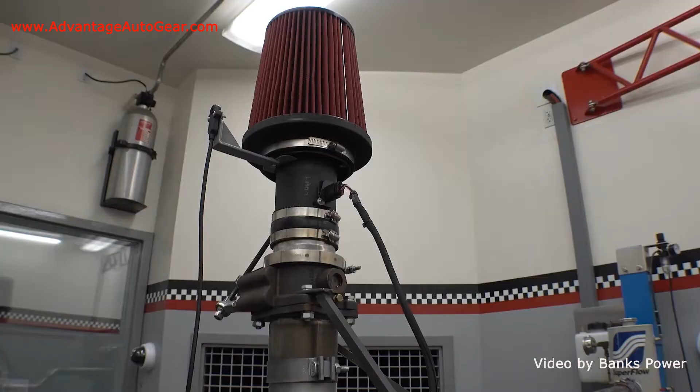Well, it's an intake air density control. I can regulate the air density going into the compressor of the turbocharger and duplicate various conditions, from high altitude to a crappy, lousy air intake system, especially one with a filter element naked under the hood with a hot mother engine. What we've done is set up a device and a test that'll show exactly how much horsepower you lose if you screw up or if you live at high altitude.

To help you understand what we're doing here, I'd like to take you back to high school. Let's go out in the shop. Okay, I want to get to some elemental stuff here. I want to take you back to the four-stroke process.

Most all of you have been exposed to this somewhere in your education, or if you're an enthusiast, you've heard it. Most engines today, in trucks, cars, whatever, are four-stroke, and they're either spark ignition or compression ignition. That's the basis of it.

What are those strokes? The crank revs two times, and you go through the four strokes. Piston drops, intake stroke. Piston rises, compression stroke. Piston drops, power stroke. Piston rises, exhaust stroke.

Let me take you through the elements of all of those, but I want to make a comment right up front: of those four strokes, only one makes power, the power stroke. The power stroke puts horsepower into the crankshaft. The other three strokes take horsepower out of the crankshaft to run their process. So you want to minimize that parasitic loss from the crankshaft. You want to maximize the power resident in the crankshaft.

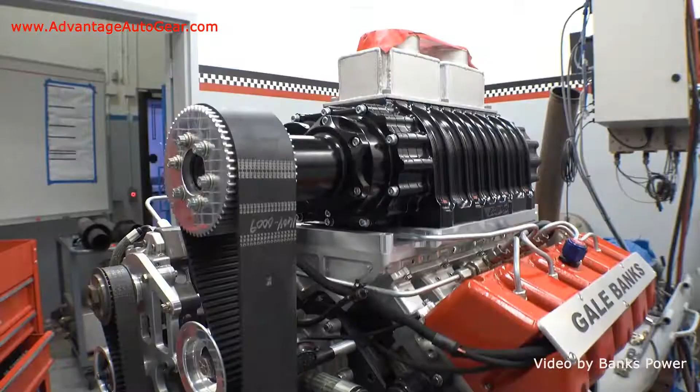It's called a supercharger. Like the three parasitic piston strokes, it also pulls power out of the crankshaft. Well, where did that power come from? The power stroke. Here's why I like turbochargers, and blowers aren't really my weapon of choice.

My tool for performance for 50-some years has been the turbocharger, because it makes better power at the same cylinder pressure. Well, what's this cylinder pressure thing about? On the power stroke, pressure is built. The combustion forces the piston down.

My message is you only get so much cylinder pressure and something fails. You either fail head gaskets or some other physical part. If you're running a turbocharged engine,

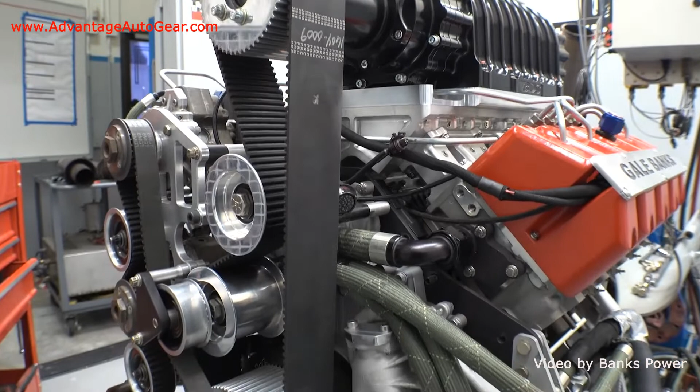you don't use energy off the power stroke to run the turbocharger. You get all of it. There's no parasite on the front of the crank driving a belt, chain, gears, whatever, to drive a supercharger. Whatever you can make to that cylinder pressure limit goes straight to the crankshaft. You don't remove part of what you've made within that limit to drive this parasitic thing on the nose of the crank, this supercharger.

You get it all. Well, where do you get the energy to drive the turbocharger? You get it on the exhaust stroke. You're still parasitic, but you're getting everything you can out of max cylinder pressure, everything you can out of the power stroke. It's far less of a problem in terms of parasitics if you take it off the exhaust stroke. You're within the structural limit of the engine, but you're utilizing all of that to drive the crankshaft.

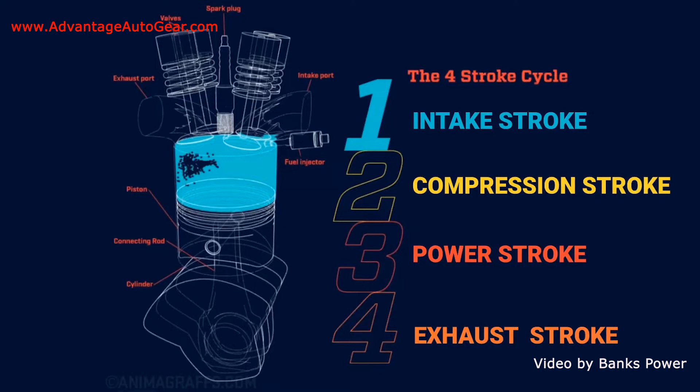So let's talk about the intake stroke. I want to give you something here, and that is all induction is forced. What do I mean by that? When the intake stroke occurs, the piston is moving so fast, it's pulling an almost perfect vacuum above the crown of the piston.

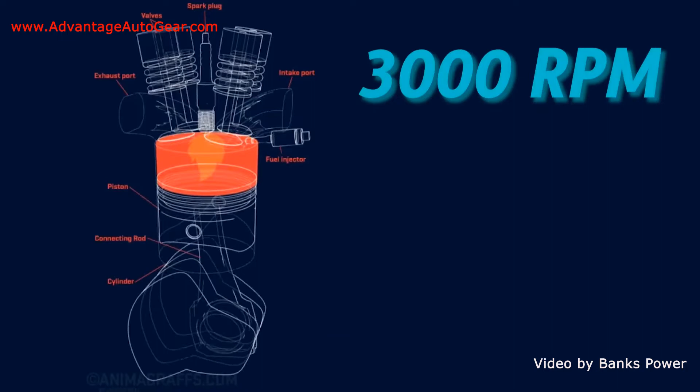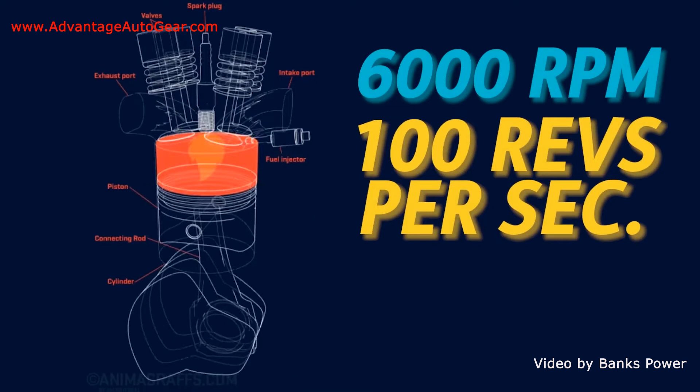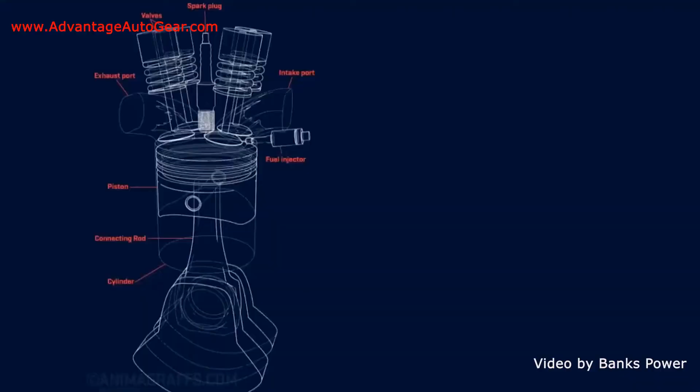How fast, you might say? Well, I did some math, and it's pretty remarkable. At 3,000 RPM, you're running 50 revs of the crank per second, and the intake stroke takes 1/100th of a second. At 6,000 RPM, that's 100 revs per second, the intake stroke takes 5/1000ths of a second. And just for grins, years ago, Cosworth did a V8 Formula One engine that turned 20,000 RPM, and the intake stroke took 1.5 thousandths of a second. An astoundingly quick movement of the piston.

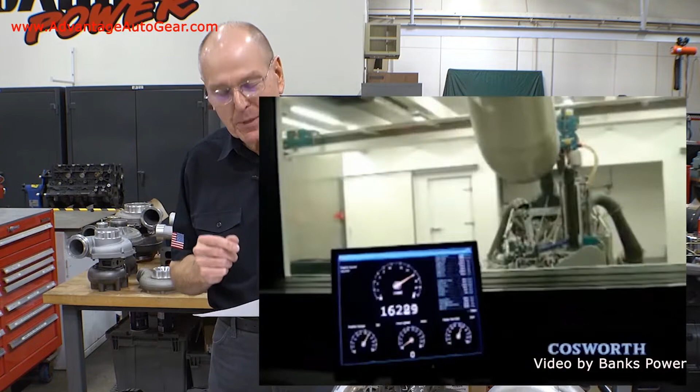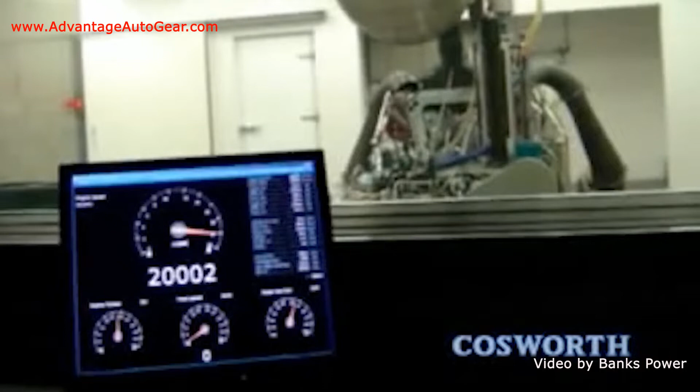In a naturally aspirated engine, the ambient air pressure forces the ambient air density into that lower pressure. There's forced induction, it's called naturally aspirated, and nature is the force. If there was no force, if there wasn't this super low pressure, almost a vacuum in the cylinder, that air couldn't be pushed in there, making hundreds or thousands of horsepower. Some naturally aspirated engines are well over 1,000 horsepower. It couldn't do it in that period of time. I mean, we're talking 100th of a second.

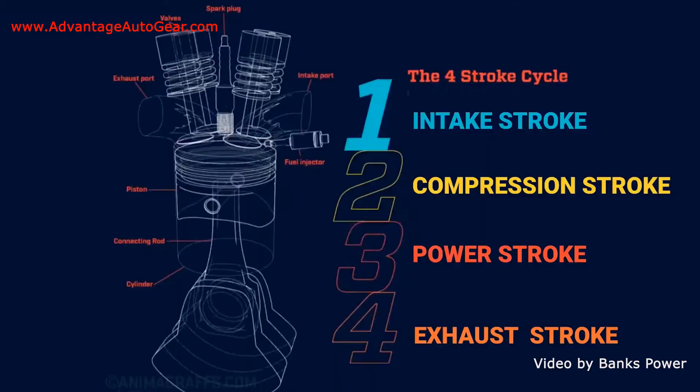We want to turn diesel engines well over 6,000 RPM. In fact, we have. So I've got the feeling you understand the four-stroke process now.

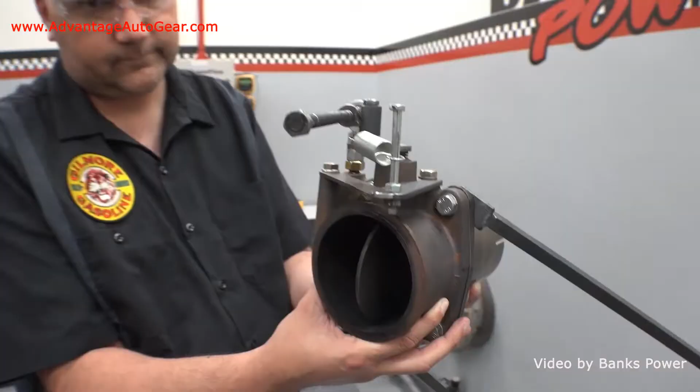So let's go back into Dyno 2 and talk about feeding the compressor. What we've got inside here is a 4-inch diameter butterfly valve that we can finely adjust to duplicate the density at high altitude, the ambient air density, or duplicate the really lousy air density you get feeding the engine if this is underneath the hood. We're going to fire this thing, we're going to run the numbers and show you the horsepower lost.

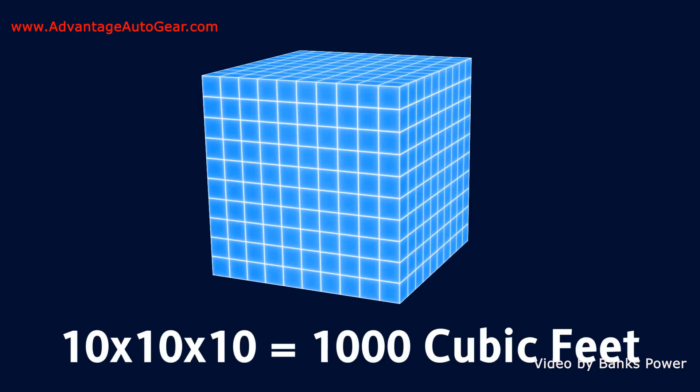Before we get this thing running, there's a few things I'd like to explain. Engines pump cubic feet per minute. What are the units? Well, the units in my mind are pounds of air per 1,000 cubic feet of volume. How do you wrap your head around 1,000 cubic feet of air? Well, imagine a room 10 feet by 10 feet by 10 feet high. That's 1,000 cubic feet of air. What does that weigh? What's the mass of the air?

Because you're mixing pounds of air with pounds of fuel in a certain ratio. It's called the air-fuel ratio. You want to hit the correct air-fuel ratio. You also want to make more power. If you want to make more power, it starts with pounds of air. What does 1,000 cubic feet of ambient air weigh?

Well, the Society of Automotive Engineers have come up with a number of standards. The one that is used by all the automotive industry in the United States is called J1349. It describes the standard day's conditions and the air mass. On a J1349 standard day, the ambient air pressure is 14.4 pounds per square inch absolute. That's the pressure above a perfect vacuum. The air temperature is 77 degrees Fahrenheit, and the humidity is 0.

On that standard day, 1,000 cubic feet of air weighs 72.2 pounds. We call this air density, 72.2 pounds per 1,000 cubic feet, a 100% day. This is the air mass that dyno correction factors correct to.

This whole thing with correction factor, in my opinion, doesn't matter much unless you want to compare your engines with others in brochures when you're selling cars. What matters to you or I is the air density where we're at and the power we make there. Wherever we live or wherever our neighborhood is, wherever we street race, or wherever we race professionally, it's called observed horsepower. And the observed horsepower is what we give a damn about.

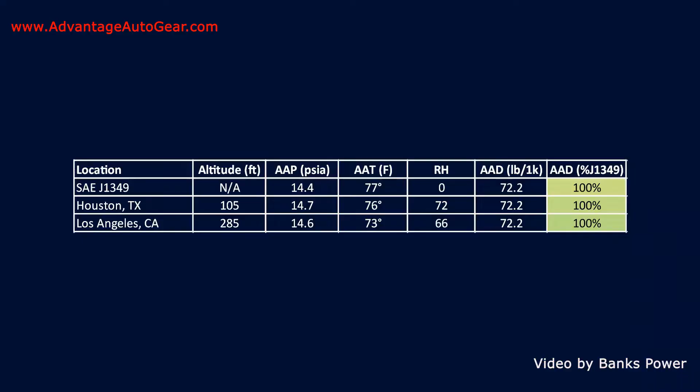You can have a different combination. I've put together a couple examples here. Houston, Texas, kind of a typical day. The altitude there is 105 feet, air pressure 14.7 pounds per square inch, air temperature 76 degrees, relative humidity about 72. That gives you 72.2, or a 100% day as well.

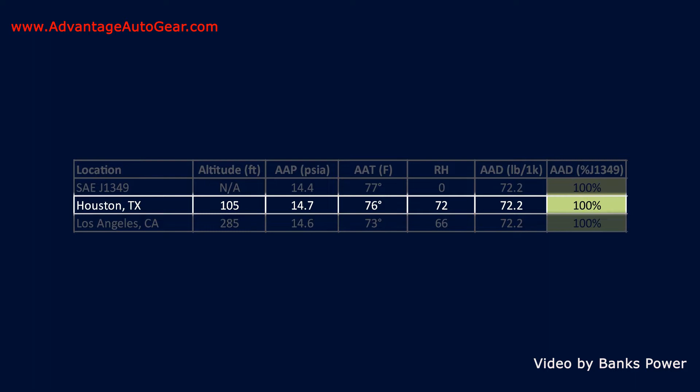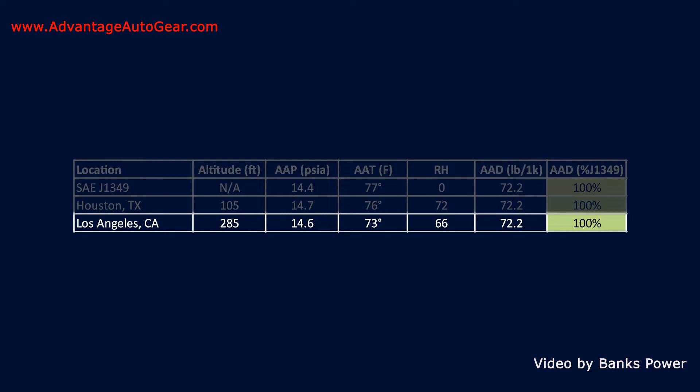Here in Los Angeles, downtown, they're lower than us, 285 feet of elevation, 14.6 pounds of pressure, a 73 degree day, 66% relative humidity. Once again, we got a 100% day, or 72.2 pounds per 1,000 cubic feet.

Temperature is your enemy, pressure is your ally, and humidity is your enemy. You can't do a damn thing about the humidity, Mother Nature, that's her trump card. But you can do something about pressure, and you certainly can do something about temperature.

We're going to run a cold air intake with a slight density loss due to pressure and temperature gain, but it would be typical of a good cold air system. Then we're going to take that good filter and put it under the hood. It's hotter under there. That's not a good thing.

You'll see why in a few minutes. And once you see why, every time you look at a filter under the hood, you're going to think, this guy doesn't know, does he? It's all about horsepower. Why would you want to give a bunch away by putting the filter in a hot air environment? That's lower density air.

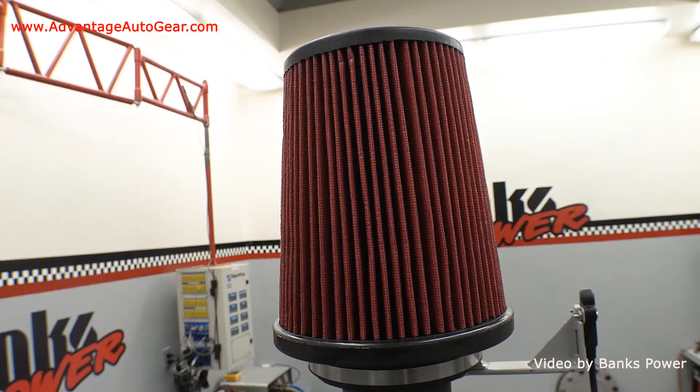In fact, our demo is going to increase the temperature 50 degrees. That drops the density to about what it would be at 4,000 feet of altitude on a typical day. You all know when you go to higher altitude, you lose power. Why do you lose power? You've lost air density.

When you go into the dyno room, you might say, hey Gale, don't you call that thing a filter on a stick? Well, yeah, I do, but there's a difference here. It's not under the hood. The room has the same temperature as the rest of the shop and the outside air here.

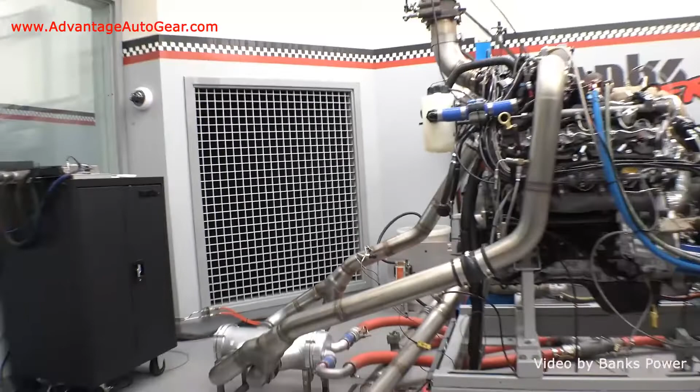It's ambient air. We move 40,000 cubic feet a minute through that room, through these giant intake grills with a monster filtration system on the ceiling up here and out to Mother Nature. So we're changing the air in that room many times a minute, and consequently, whatever the temperature is right here where we're sitting is going into that filter as well.

First test will be that ambient air intake, a good system. The second test and the third test are actually the same test. There's quite a drop in density. We've took the higher temperature and balanced it with a lower pressure. I'll explain all that on the back side when we look at the data.

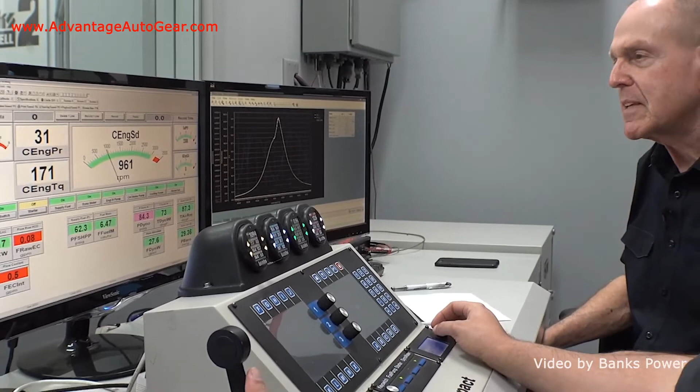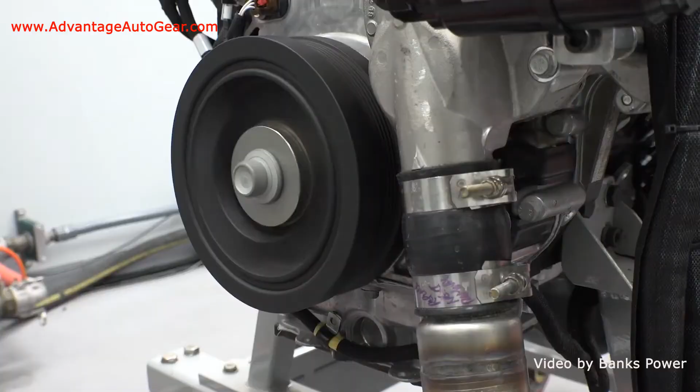Let's go ahead and take it up, 3,000 RPM, and nominally we're around 450 horsepower on this test sequence. All right, we're at 201 degrees out into the tower, 202 now. Let's go ahead and pull some power. We've got the butterfly completely open. There's no density reduction through the butterfly, just the filter and the intake tube.

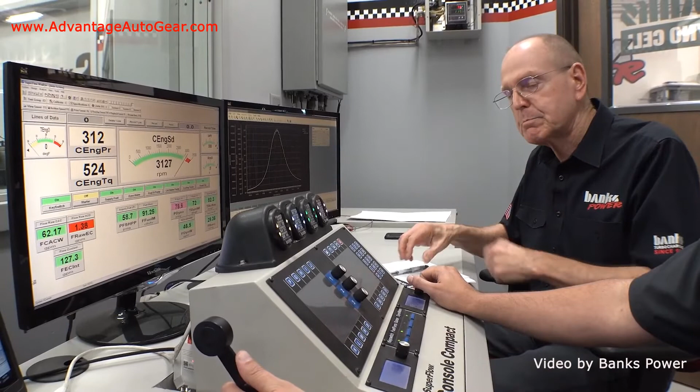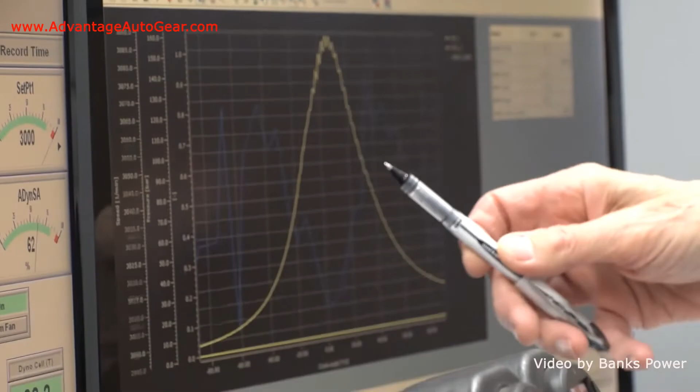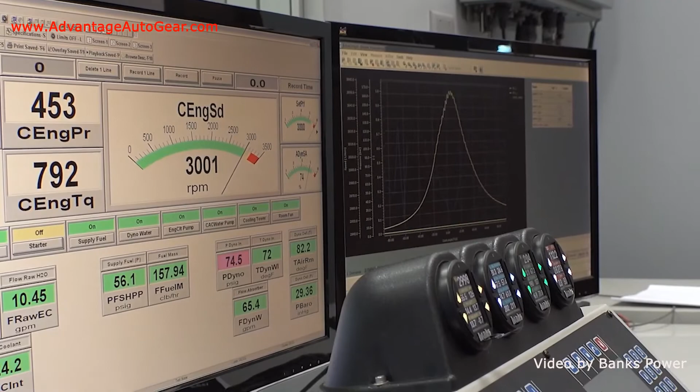Here we come. Cylinder pressure is looking good, 160. Looking... 450. Right there, there it is, 454, right in there. Yep.

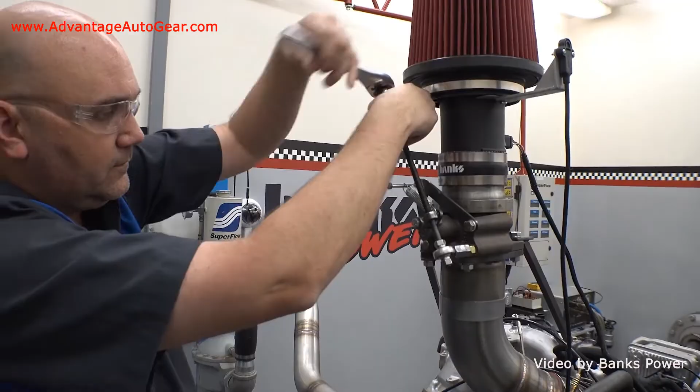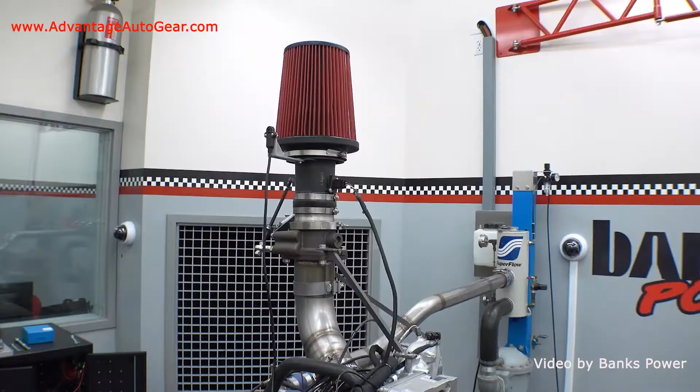All right, let's go into the dyno cell and crank down that butterfly. We just closed the butterfly down, but one thing I want to say about that filter in there, that's what I call the first of my big ass filter program. That's the L5P, the Ford and others are coming. That filter is invisible to airflow.

It's almost not there. When I saw the numbers off the flow bench, I went, go back and do it again. And sure as hell, just at 1,000 CFM, the thing's only dropping a few inches of water in terms of pressure drop. I've never seen an air filter quite like that in my entire life, and I'm pumped out of my gourd about it.

We've restricted. We're going to drop the density to 50 degrees hotter, or 4,000 feet of altitude, about 12.5%, 13% drop in air density feeding the compressor of the turbocharger. Let's pull it. Let's go ahead and pull it. See what we get for power difference.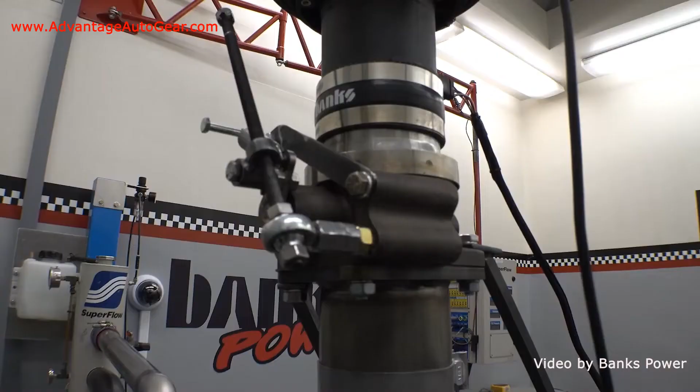Data logging is on. All right, here we go, guys. Cylinder pressure's been pretty comfortable on these runs. It's kind of right around that 180 design, 183, I think it is actually.

All right, pulling it up. All right, 3,000, there we go. Got the number. Okay, let's pull it back. And we will stop the data log.

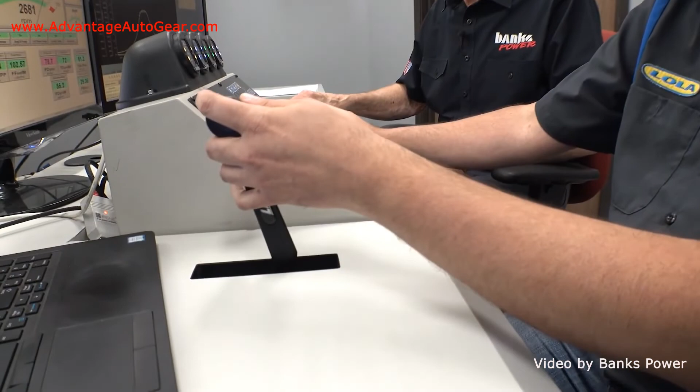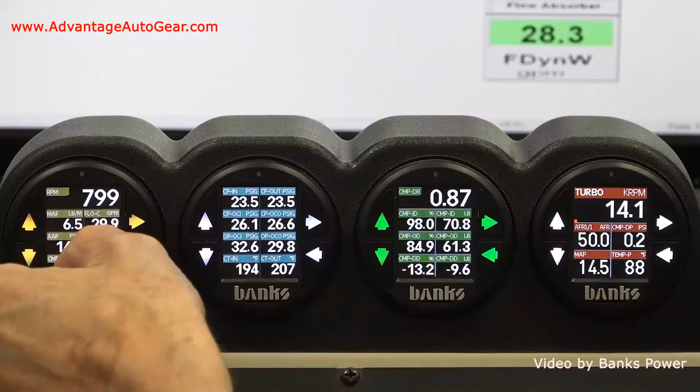All right, there we go, data log stopped. Let's pull the SD card and go crunch the numbers.

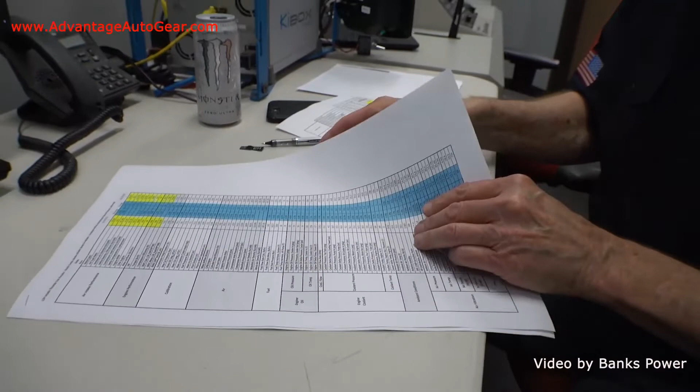I've got a little condensed section here that I did. The actual amount of data, we're only going to look at a little bit, but this will give you some idea of the amount of data we've pulled off that SD card. A whole lot of this stuff is going to be really interesting

as we proceed to try to kill this engine. Let's talk about the ambient conditions we duplicated and the hot underhood placement of the filter that we duplicated.

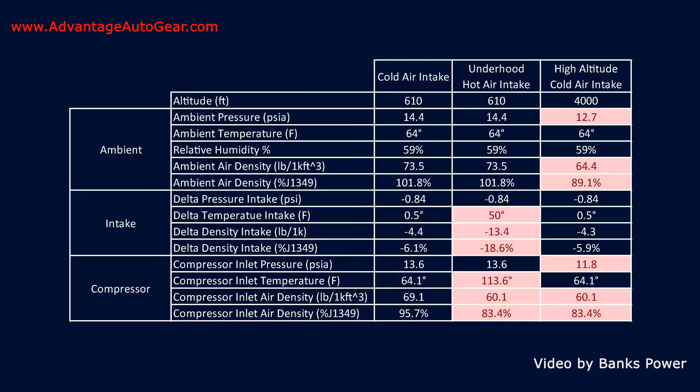Looking at ambient conditions, we've got a cold air intake, we've got an underhood hot air intake, both at the same altitude. Then we have a cold air intake at 4,000 feet of altitude. The difference at 4,000 feet is the pressure goes from 14.4 psi absolute to 12.7.

Less pressure, less density. Ambient temperature at 64 degrees and ambient humidity at 59% is kind of fixed by where we're at. The ambient air density, though, with that lower inlet pressure duplicated by that density valve, is different. Instead of being 73.5 pounds or 101.8%, almost 102% ambient air density, we're down to 64.4 pounds per thousand cubic feet or 89% ambient air density.

So that's crippling when you go to altitude. But you don't have to go to altitude to get that. You can just put your filter under the hood and shut it and inhale that hot air. So what happens then? Well, we're 50 degrees hotter under the hood than we were outside. Instead of 64 degrees, we're about 114 degrees. That's that nominal gain of 50 degrees.

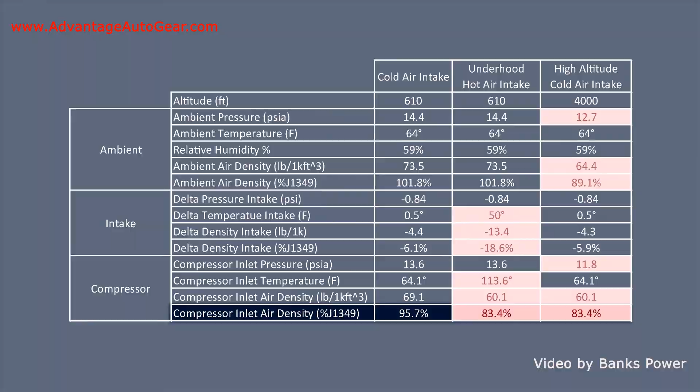Let's have a look at the final results. We locked our boost pressure in at 28 pounds. We locked our air-fuel ratio in at 24:1. Our ambient density on both tests is the same. This is basically the 610 foot of altitude hot air under the hood test results. The 4,000 foot results would be the same.

So let's run through what we got with a good filtration setup and a bad, hot air filtration setup at the same altitude. The density loss through the filtration and the tube, etc., 6.1% with cold air and 18.3% with hot air. Pretty remarkable. So your compressor inlet density went from 95.7% down to 83.4%.

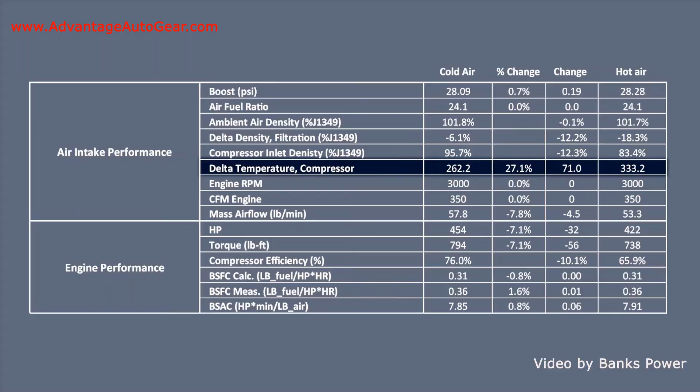Here's the thing, we're maintaining constant boost, but the next line item, which is the delta temperature, or the temperature gain through the compressor on the turbo, went from 262 degrees to 333. What's up? Well, we're pushing the compressor, we're making it make the same boost, but it sure as hell isn't making the same density. Why? Because it's heating the air more to make the same boost.

We're at 3,000 RPM. The engine is a 6.6 liter Duramax. It's pumping 350 CFM in both cases. But look at the mass airflow. We were at 58 pounds per minute with the cold air intake, and we're at 53 pounds per minute with the hot air intake, but the boost is the same.

Wait a minute, what's going on? I'll tell you what's going on. The horsepower went from 454 to 422. We lost 32 horsepower. Same boost, same air-fuel ratio. Torque went from 794 to 738. We lost, at 3,000 RPM, 56 pound-feet of torque.

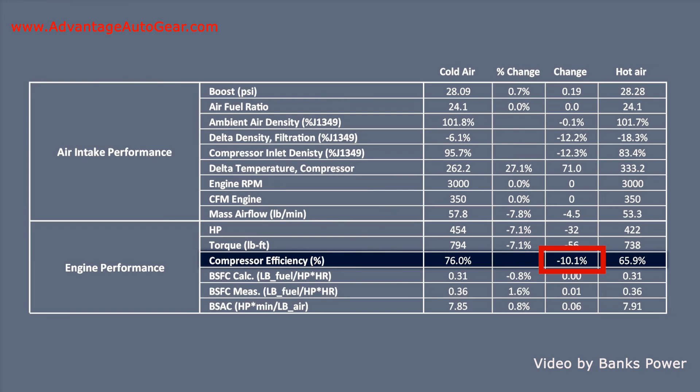And here's the revealing thing: the compressor efficiency went from 76% to 66%. We lost 10% of the turbocharger compressor efficiency. That's why it's heating the air more. It's pretty obvious we're pushing the hell out of this turbo.

And that will be the subject of episode number 5. Stay tuned.